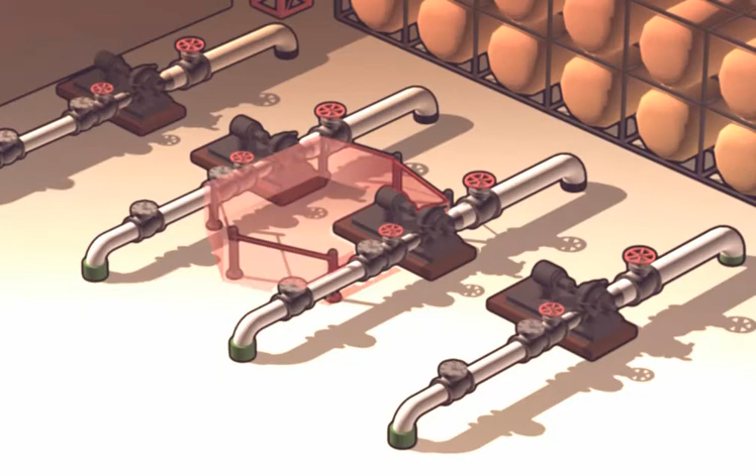What is the purpose of access control? The purpose of access control is to prevent traffic in an area where personnel may be subjected to hazardous situations. This means that no unauthorized personnel shall be within restricted areas.

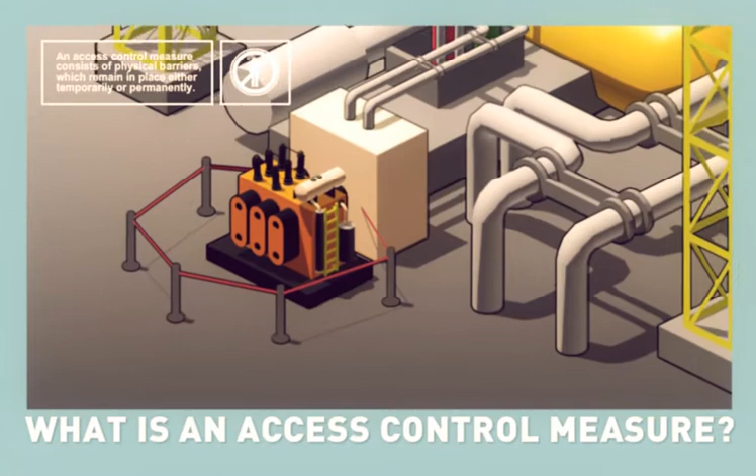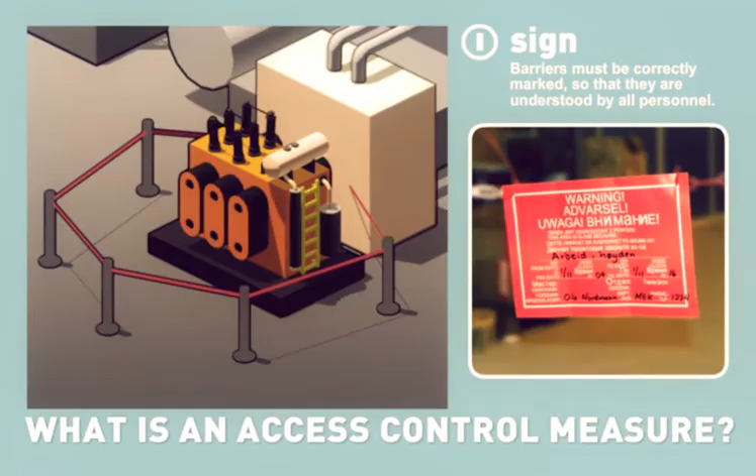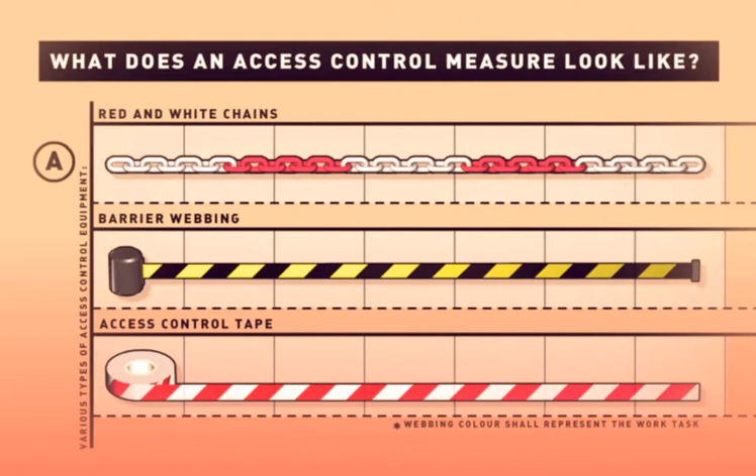An access control measure consists of physical barriers, which remain in place either temporarily or permanently. The barriers must be correctly marked, so that they are understood by all personnel. There are various types of access control equipment, which are suitable for different work tasks. Temporary access control measures often consist of red and white chains, barrier webbing or similar.

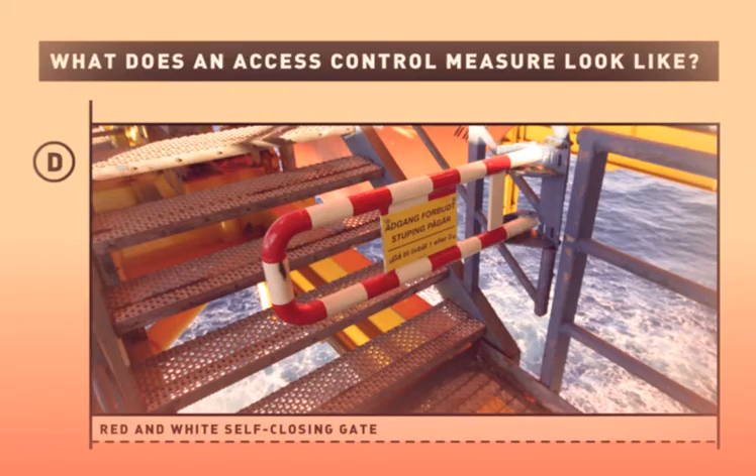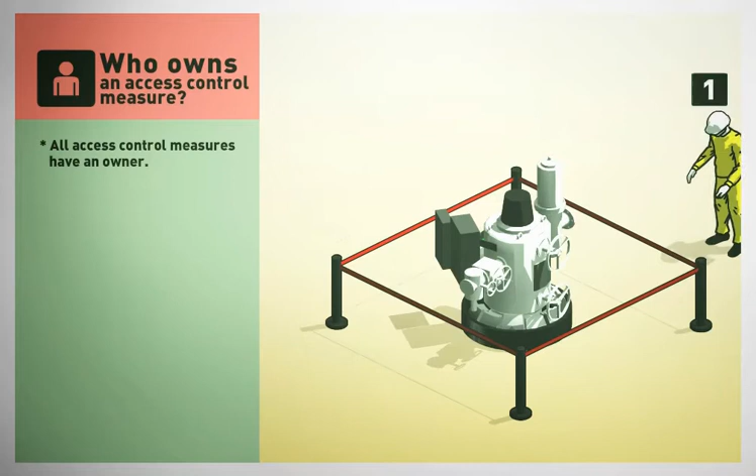An access control measure can also be an integrated part of the area design, such as a red and white self-closing gate. Access control measures do not implement and remove themselves. All access control measures have an owner. The executing worker is responsible for establishing access control.

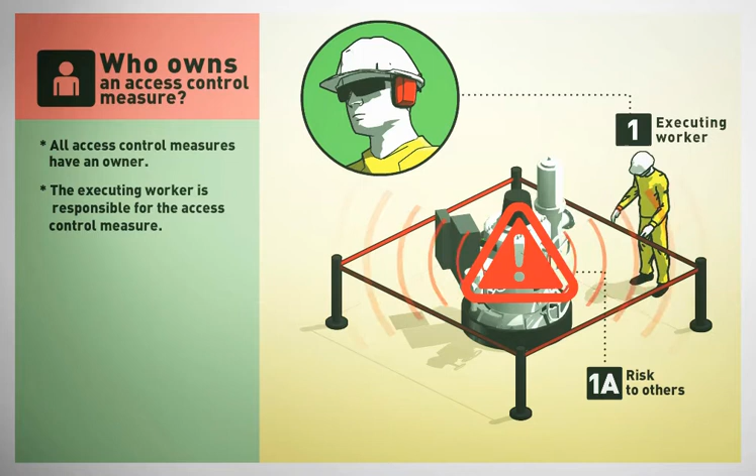This means if you shall carry out work that involves risk to others, you are responsible for establishing a restricted area. This shall be done in consultation with the area technician or area responsible, who shall approve the access control measure. The executing worker is also responsible for maintenance of the access control measure. Don't forget to remove the access control measure as soon as the area is cleared for normal traffic.

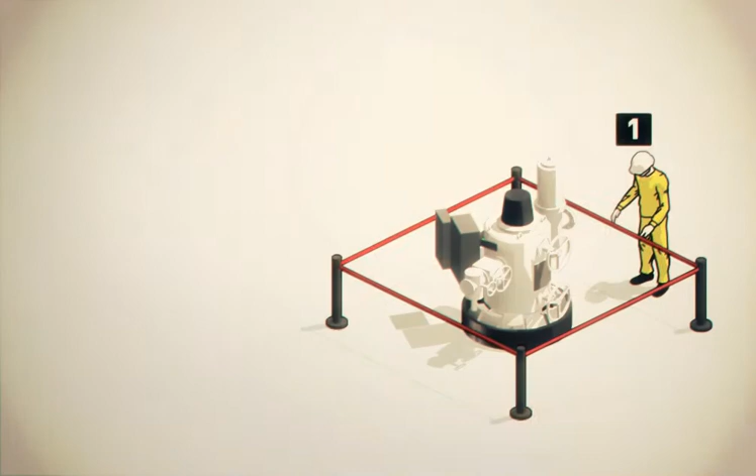So that it is clear who owns an access control measure, the restricted area must be marked. The sign must be clear and provide information about relevant hazards, the type of access that applies, no access or authorized personnel only, the owner of the restricted area, and the channel or telephone number on which the owner can be reached. The sign may also provide information such as references to any relevant work permit, and the time at which the access control measure was established.

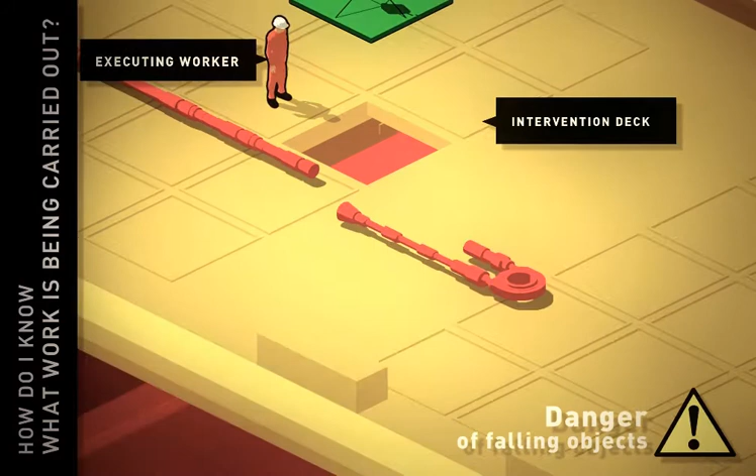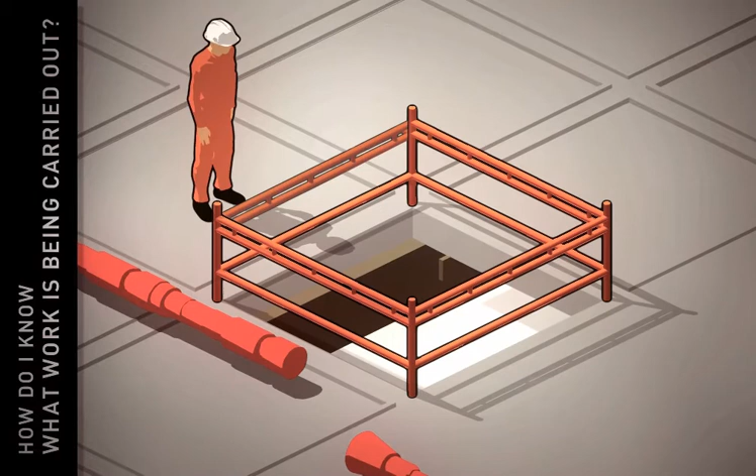Access control measures must be respected, even if you do not see work being carried out. Not all hazards are equally visible from all levels, for example the danger of falling objects. Holes or openings that present a risk of personnel falling to a lower level shall be physically secured to prevent danger to personnel. These access control measures should be as solid as a railing.

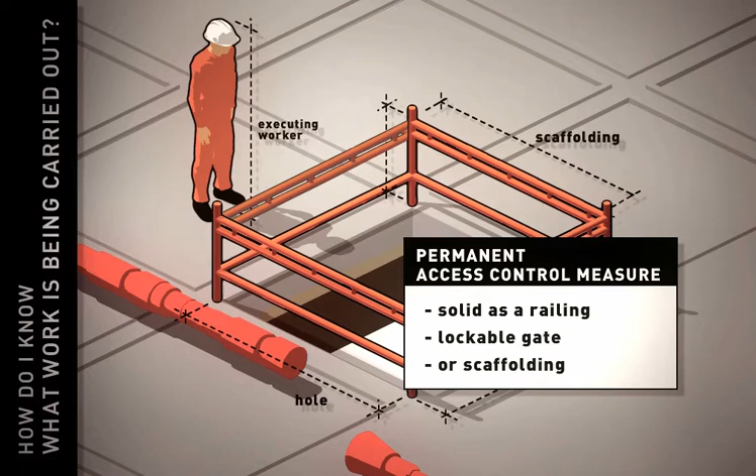For example, this might be a lockable gate or an access control measure installed using scaffolding materials. The access control measure must be marked with red and white access control webbing or tape. This should be wrapped around the railing. The presence of security personnel cannot replace access control measures that are designed to physically prevent falls.

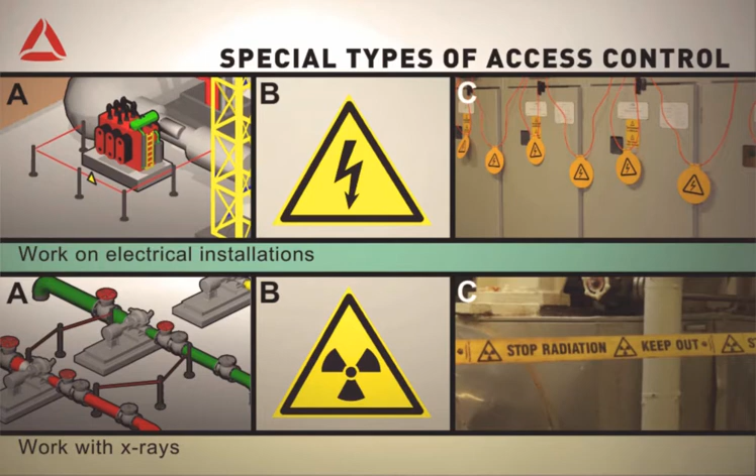If the access control measure is a physical obstacle in an escape route, the alternative escape route must be described and clearly marked. Some types of work require special access control measures. If you are carrying out work on an electrical installation, the area must be cordoned off using red webbing and a triangular yellow and black sign showing zigzag lightning. For work involving radiography, the area must be cordoned off using access control webbing and a sign that shows a black radiation symbol on a yellow background.

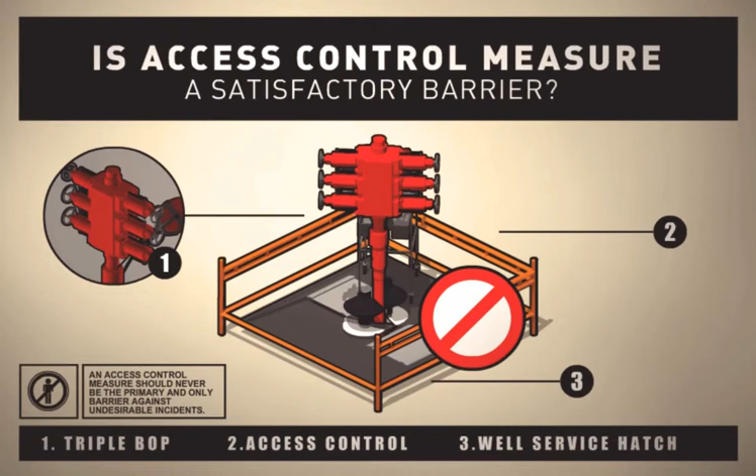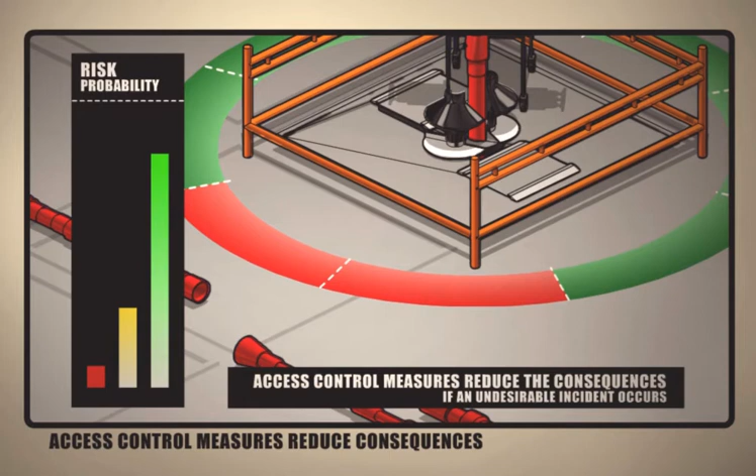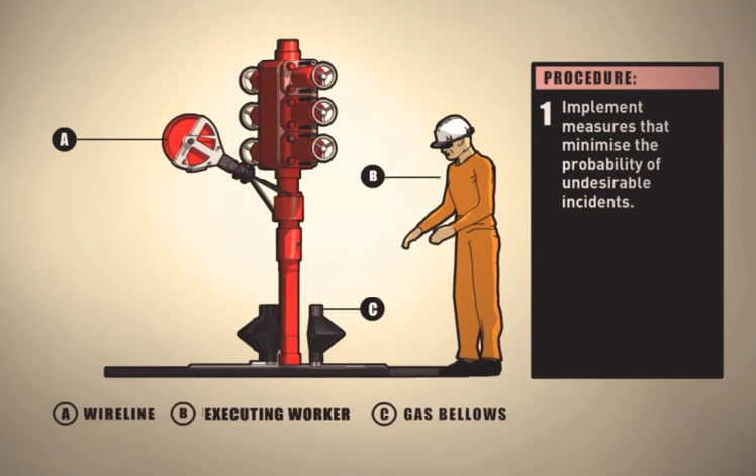An access control measure should never be the primary and only barrier against undesirable incidents. An area is cordoned off to reduce the consequences of an undesirable incident occurring as a result of the activities being carried out in the area. You should therefore implement measures that minimize the likelihood of undesirable incidents occurring before you establish access control. You then implement the access control measure that will reduce the consequences if anything goes wrong.

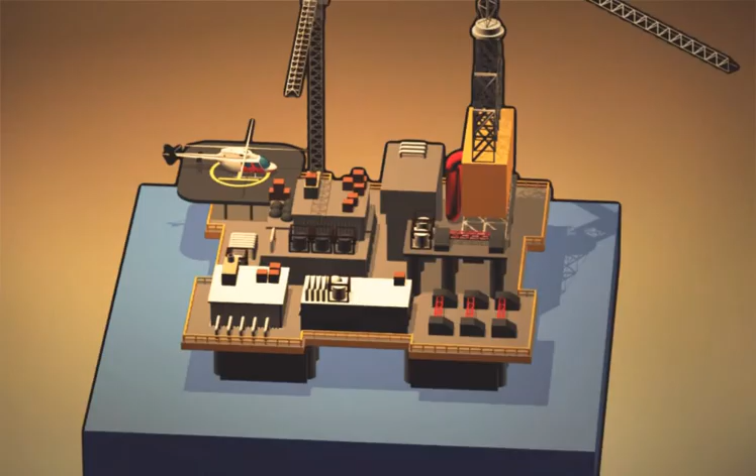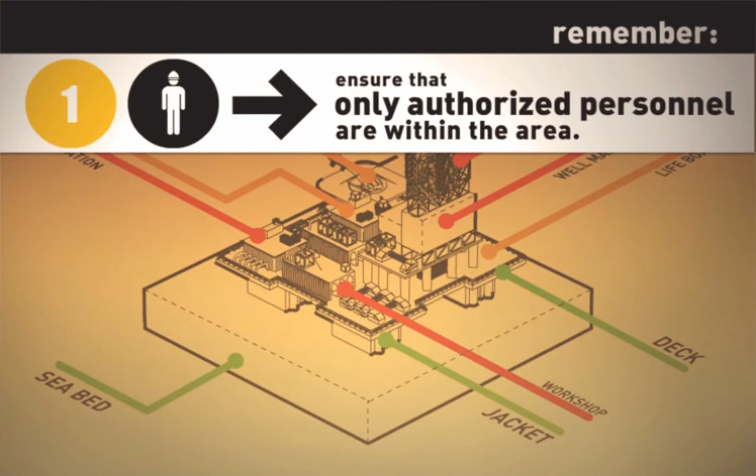Before starting the work, you must ensure that only authorized personnel are within the area. Remember to remove the access control measure when the work is completed. If the restricted area is not yours, there is only one thing that you should do: keep out.